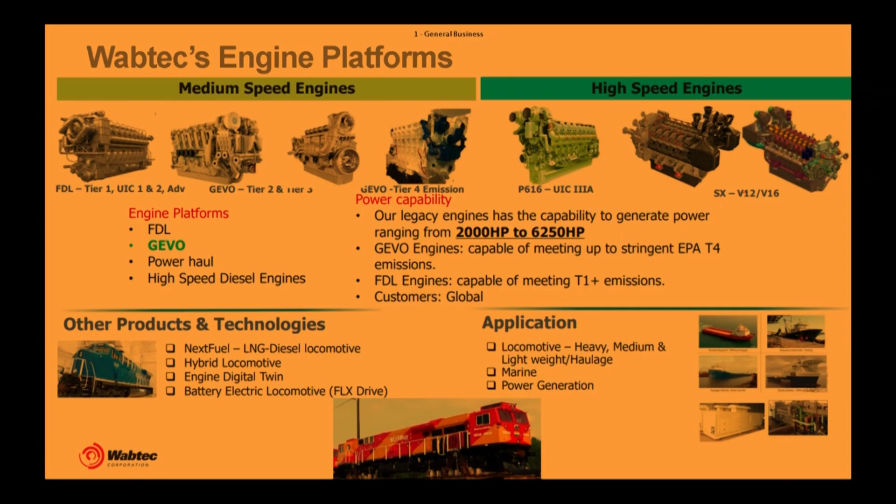Now, what are the basic parts of the engine? So, you see there the power generation piece, the V12 or a V16 engine. Coupled to that is an alternator. So we have our GMG series alternator. That can either be bought out or we can also make alternators. And then the alternator supplies power to IGBTs and then to traction motors. So that is how the locomotive runs.

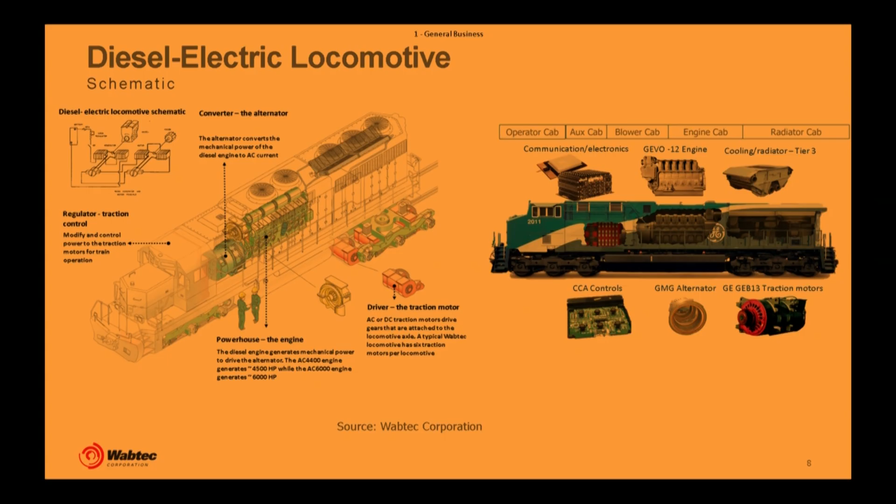Okay. So what are the opportunities where we can use CFD or simulation as a whole to make this product a success? Okay, so let me go to the heart of the slides very quickly.

So now how do we divide this? We can divide this by the product, or we can divide this by the timeline in which the simulation needs to show results. So the first category I would put at is problems.

Now if we see some problems in field and we think that it is caused by a flow thermal problem in a component, we need those results very quickly. As Dr. Ashok previously said, we need the results in 2 days, or in industry lingo, we need the results yesterday. So yeah, that is where the first category of results is, right? And doing a CFD in that scenario is very difficult.

So generating a mesh itself takes a couple of days. So solving it is questionable. Beyond that, you might also need to do further analysis. Like CFD will just give you the temperatures. You might need to take those temperatures to a structural model and then solve the structural for the durability,

solve a low cycle fatigue code, and then say that yeah, this is the problem because of which the component is failing just after installation. The loco is just rolled out of the manufacturing line and the component's breaking.

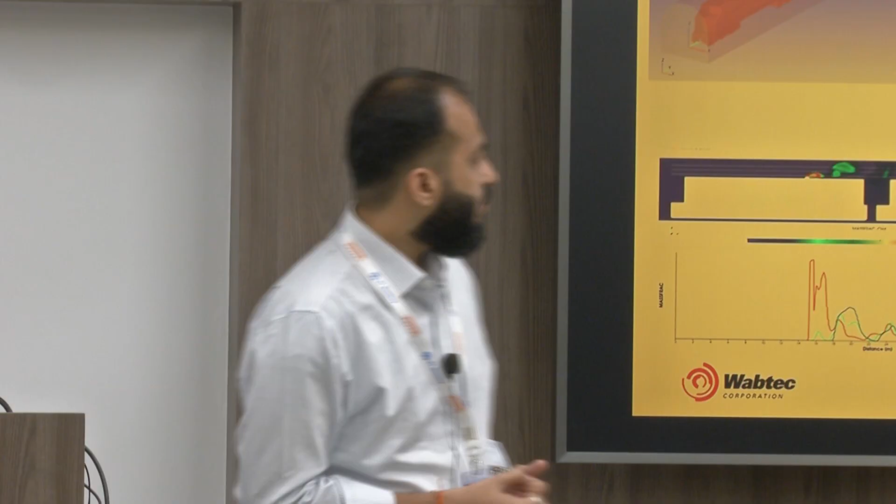Now, the second category can be program based, where you have decided that you are going to use a simulation tool to help design your component. Okay. Now, this component can be designed in-house, or it can be a bought out component. It's very easy to start simulation on an in-house component because the CAD details are captured very easily. You can start the program in a very planned manner.

If it's a bought out component, it gets a bit of a struggle getting the correct CAD for your variant of the part that is getting supplied to you. So yeah, the program based analysis can involve CFD, can involve a further FEA if required, and that based on the budget and timeline can be a 3 months to 6 months timeline.

And further to this is 5 years down the line, what are we going to do? So that is a part of the advanced engineering team that I work on, and for that we do combustion. Like an example will be a combustion simulation, where we do the combustion on the cylinder and then predict the emissions, although we are not there yet.

And as far as tools at Wabtec go, we are still with commercial tools. We don't use a lot of OpenFOAM. It is almost close to zero. So I'm trying to pioneer OpenFOAM into Wabtec for simpler applications at first to prove the capabilities and then go to complicated applications. So let's go component wise.

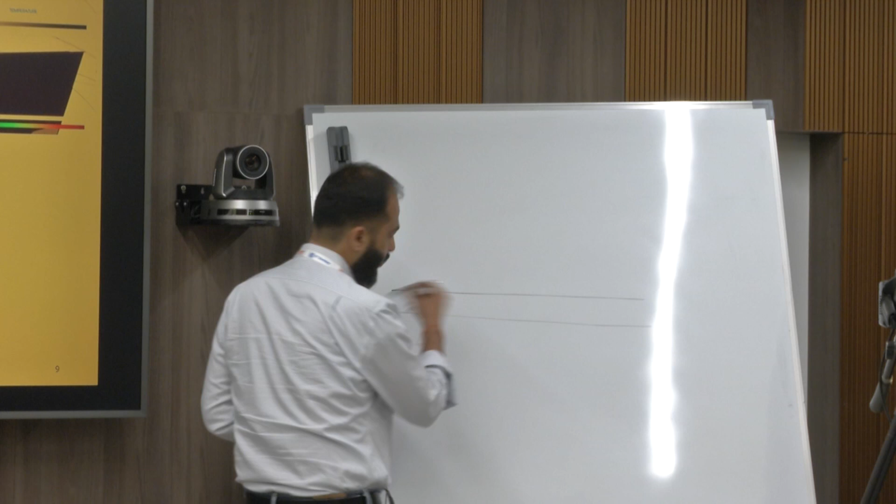Now, thanks for keeping this board because it's useful. So you have the full platform, which is a couple of meters long. Okay, it will take you about 15 seconds to walk the length. Now you need to ventilate this because there are a couple of motors attached below it. Okay, so how do you optimize this design?

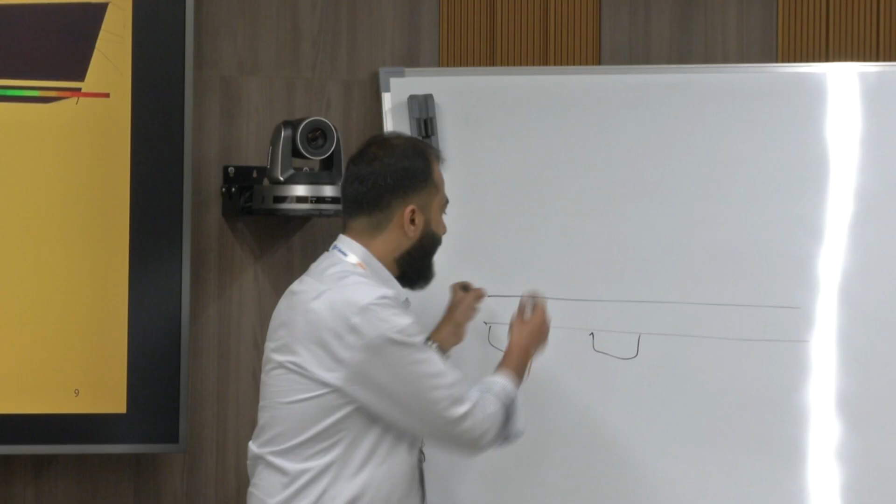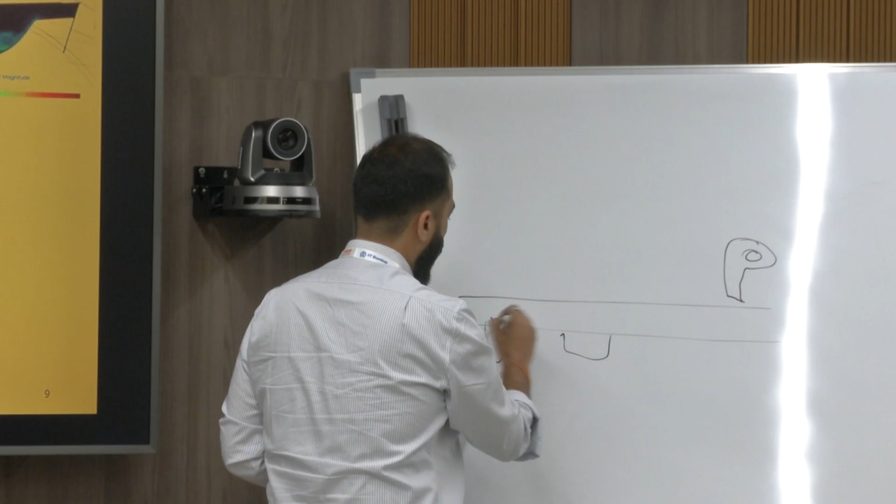Now one case can be your entire platform is manufactured and you are going to place the fan and place the sheets on them to decide how the airflow is going to go. So there is a fan here. Okay, and then are all the motors getting equal amount of air or not is what you need to design.

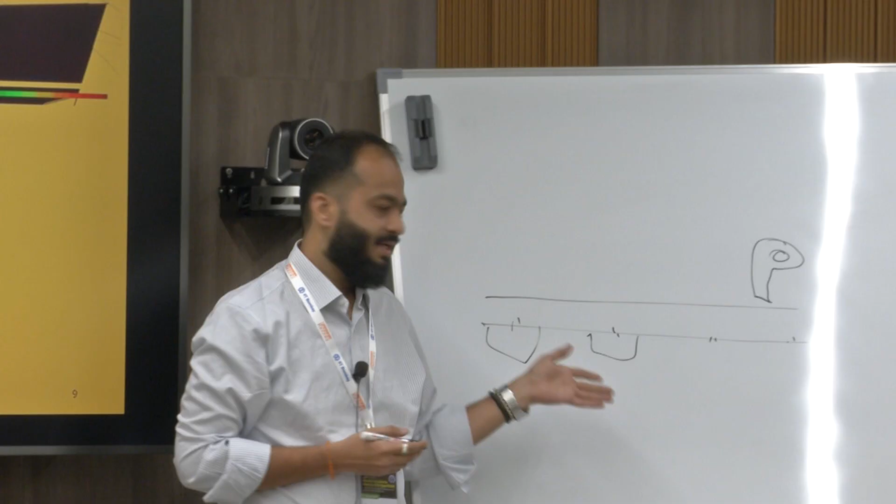So this is one application on the platform side where CFD can be useful. Okay, you can simulate the entire platform in CFD and then decide whether all the motors or all the components are getting the airflow efficiently or not.

Second application example I can show on the platform side is the operator cab. So the operator cab is where the operator sits and operates the locomotive. Now in India we do not have any standards for operator cabs, but in US the standards are a bit high. The operator cab needs to have a toilet, and it needs to be ventilated, it needs to be air conditioned. Okay, so our locos, the ones which we are supplying to Indian Railways, also are ventilated and they do have air condition.

So the ducting of the operator cab is also important, and it takes about 5 days to get the ducting right. But if the problem is taken to CFD, you can simulate the problem on CFD and get the operator cab ducting right. Okay, it will take more time, but definitely on field you are sure that this type of ducting is going to give out airflow. Same thing for this process, if done on field for the platform, takes about 12 to 20 days to get it right, to get the flows on all the components right. But if done on CFD, this process on the field can come down a lot. I mean, you can get it right in design stage itself.

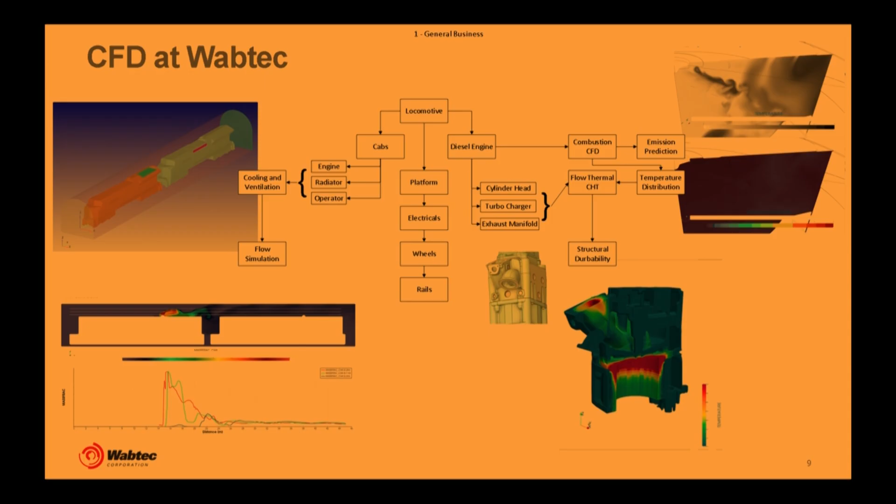So yeah, another point I need to make is CFD alone may not be enough,

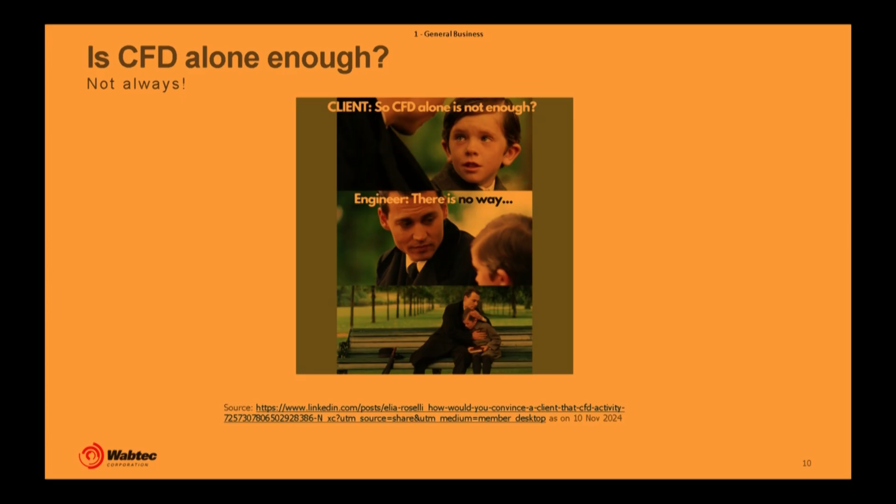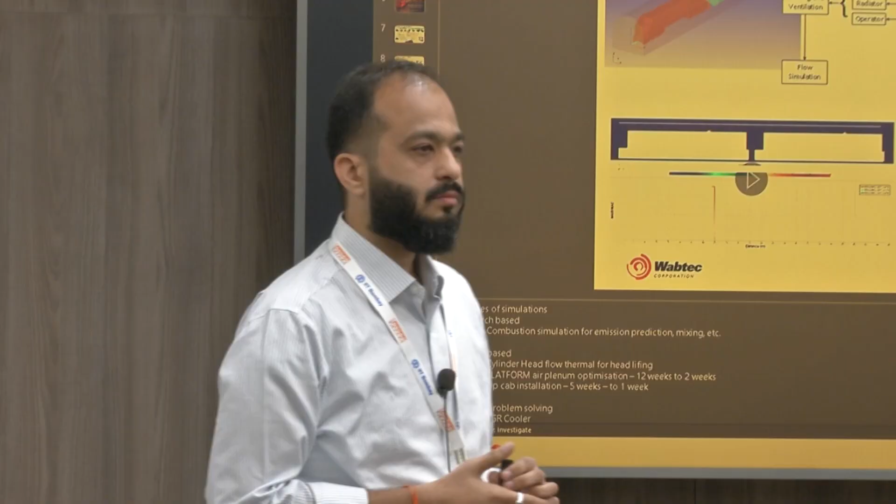Any questions? Yes, sir. So thanks for the interesting talk. Query: the Indian locomotives, despite now planning to run at 160 km/h, are almost flat front instead of like we see in others. Is there any reason specific to India, or does it work well like that also?

You need to bring in innovation there. This point was very much brought up by one of the colleagues who worked on aerodynamics earlier: why aren't Wabtec locomotives aerodynamic? Okay, there is a thought process behind it. There is no other issue. So now if you go to the Wabtec website, you will see a nicely aerodynamic loco which we are actually working on. Thanks. Nice question. Thanks.